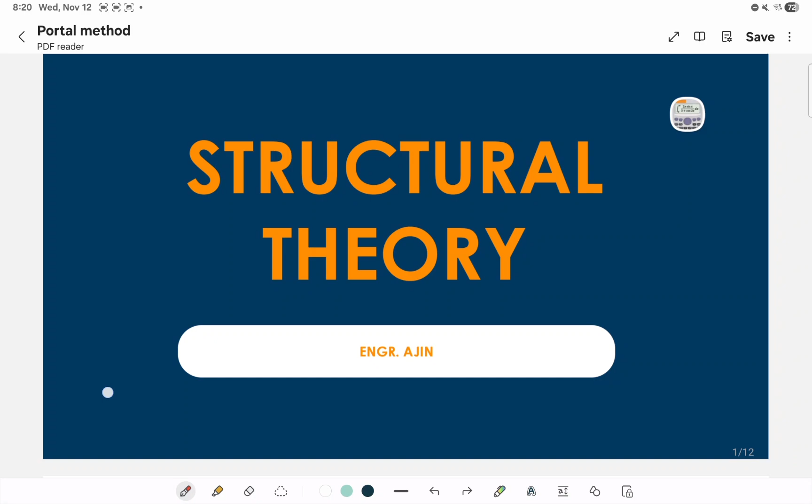Let's start with what's on your screen. Structural analysis is the prediction of the performance of a given structure under prescribed loads and/or other external effects such as support movements and temperature changes.

I took this from the book. In structural analysis, we have analysis of determinate structures and analysis of indeterminate structures. For determinate structures, I taught you how to get the stability and determinacy of certain structures.

We covered that for frames and for trusses. After that, I taught the next topics: area moment, double integration, and superposition.

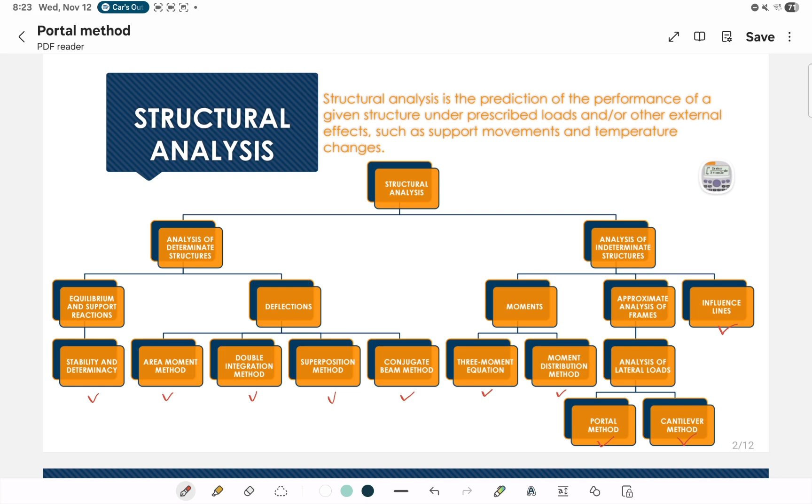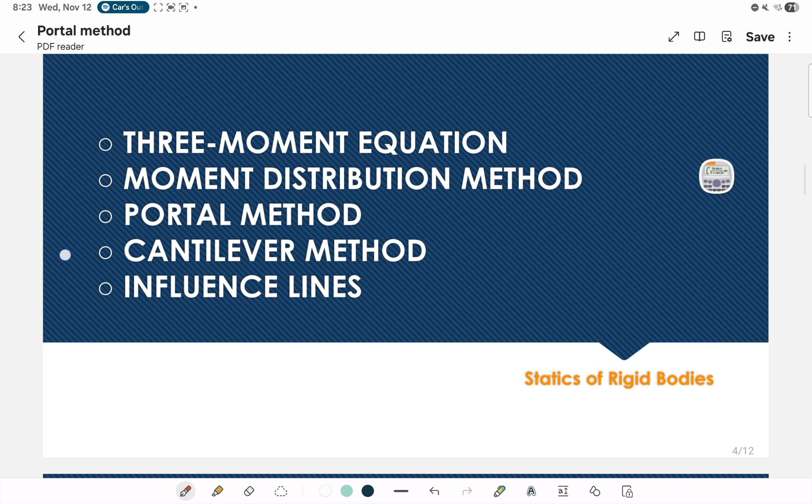The internal forces are estimated by making certain assumptions about the deformations and/or the distribution of forces between the members of structures, thereby avoiding the necessity of computing deflections. The primary reason for using approximate analysis in structural engineering is to quickly and efficiently estimate the internal forces and moments in indeterminate structures.

Particularly, this approximate analysis is done or analyzed during the preliminary design stage when we are designing a structure, before it moves to the construction phase.

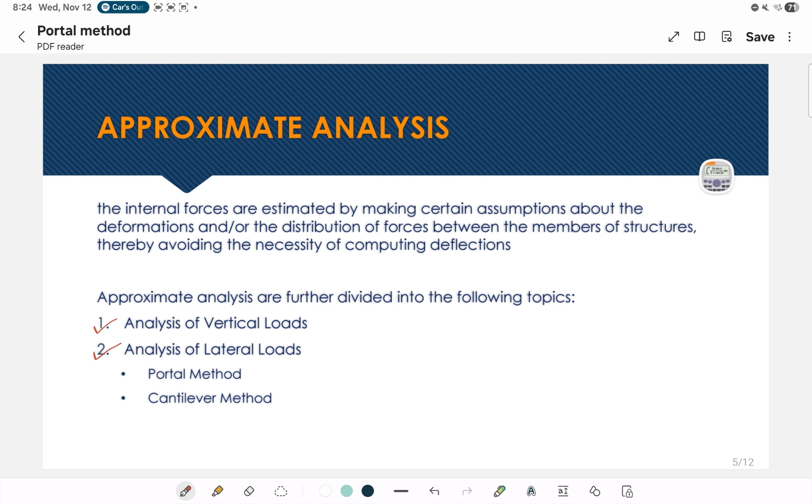The first is analysis of vertical loads, and the second is analysis of lateral loads. The portal method I will teach today falls under the analysis of lateral loads.

Let's proceed. Go ahead and read this. Here we go directly into the portal method. The portal method was initially developed by A. Smith in 1915 and is generally considered appropriate for the approximate analysis of relatively low building frames.

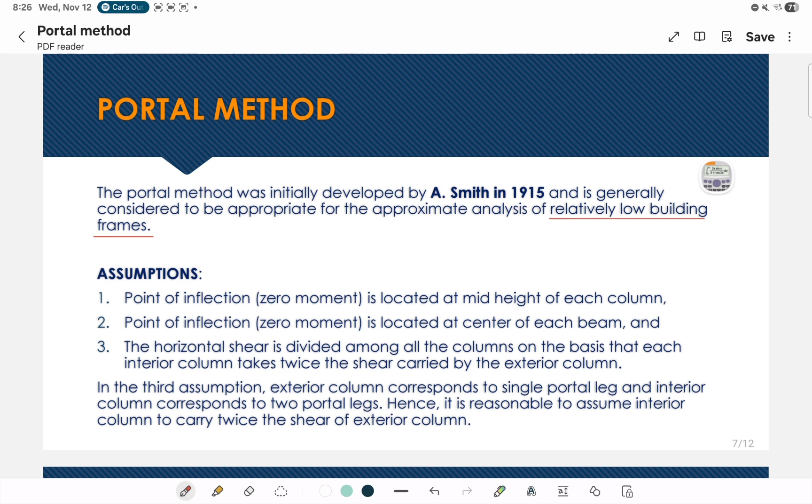Before we proceed to assumptions, let me insert this since I didn't include it when I made this presentation. Let's zoom in on this figure here. This is from your book, Structural Analysis by Aslam Kassimali.

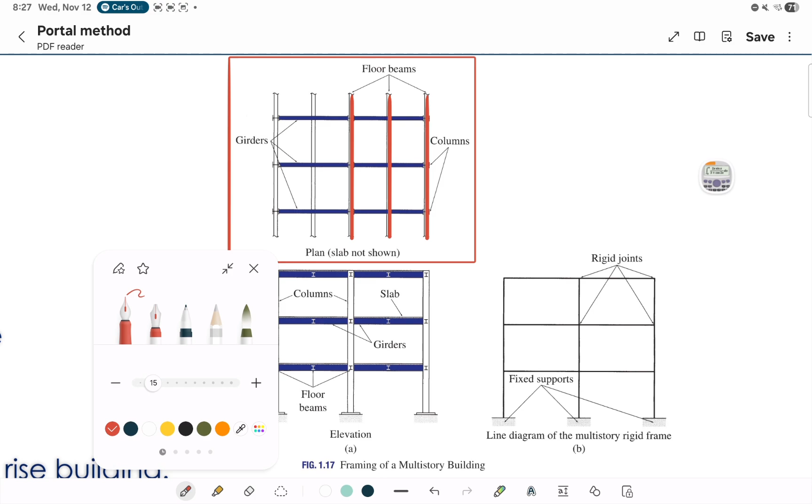Para ma-visualize nyo lang, kasi pagdating sa example, hindi na to masyadong i-explain. Direkta na agad siya sa line diagram niya. Okay, pag makikita nyo naman dito, ang mga columns natin ay andito siya. Since top view siya, mukha lang siyang mga square dyan. Ito lang siya.

Of course, hanggang dito yan ha. Hindi ko lang kinampleto, pero hanggang doon yan. Hindi ko rin kinampleto yung floor beams. Okay, so next one, i-check naman natin yung elevation part niya.

Ayan, siguro naman nabivisualize nyo na to. Pero syempre, hindi natin pwedeng laktawan. Okay, dito naman sa ating elevation part. Makikita nyo dyan yung tatlong parte ulit ng ating isang typical na low-rise building.

Pakita ko lang yung columns natin na orange yung ginamit natin kanina. So ito siya, ito na siya. Yan na yung mga columns natin. Of course, the girders are always the blue ones.

And then yung ating floor beams, makikita nyo na siya dito. Ayan, dito na siya makikita, itong mga square na kulay red. Okay, so sa line diagram niya naman, ganito naman yung itsura niya.

Ayan, ito yung kadalasang nakikita nyo na kapag nagdo-drawing ako sa board at nagpapakita ako, o nagdo-drawing ako ng mga frames. Okay, ito na siya. Ay, bakit ganun?

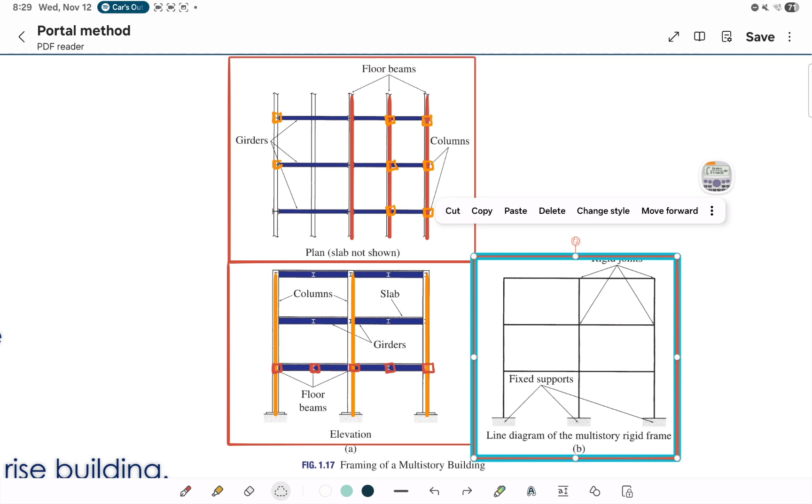Yan, yan na yung papakita ko lang. And then ilalagay lang natin dito, fixed supports. Ayan, ganyan, ganyan yung makikita nyo lang sa ating mga problems dito.

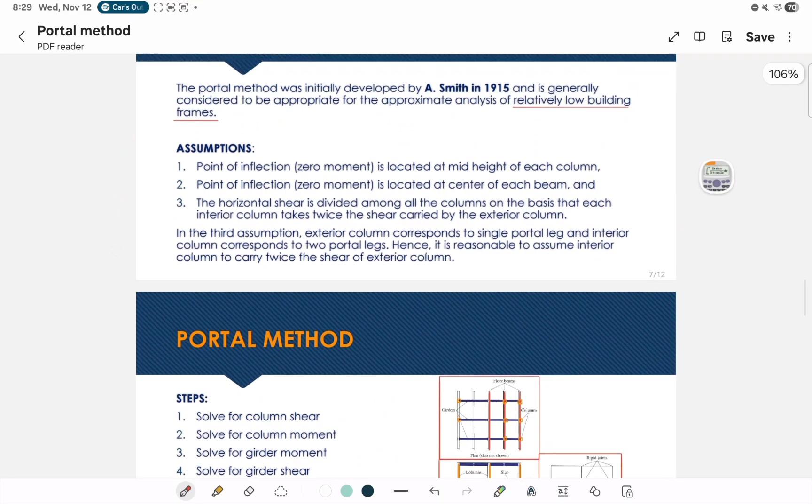Okay, so ayan. Punta ulit tayo, balik tayo doon sa bago dito. Ayan, so assumptions. In solving portal method, you need assumptions.

Okay, so first assumption, point of inflection or the zero moment is located at mid-height of each column. So sa center, mid-height, okay, nasa gitna. And then next one, number 2.

Assumption number 2: point of inflection or the zero moment is located at the center of each beam. Okay, pwedeng beam, pwede ring girder. Depende naman kung saan ka nakatingin eh.

Okay, next one will be the horizontal shear is divided among all the columns. Okay, so parang paghahatian nila yung horizontal load natin, paghahatian ng bawat columns. Kaso here's the catch: makikita nyo dyan, each interior column takes twice the shear carried by the exterior column.

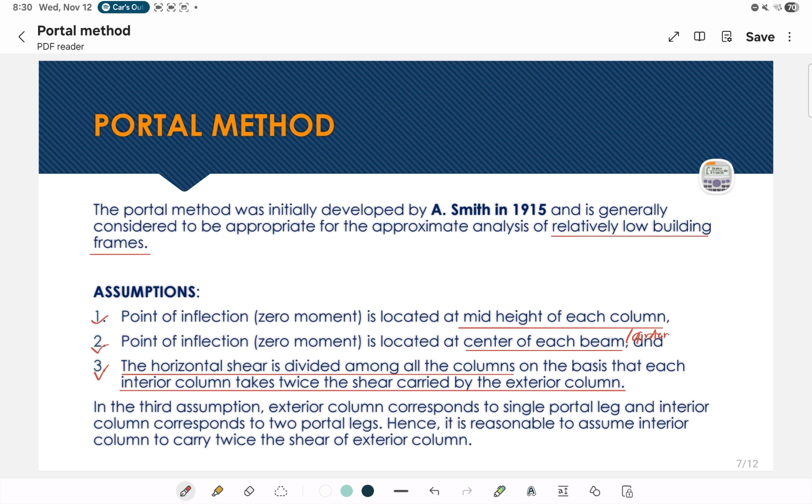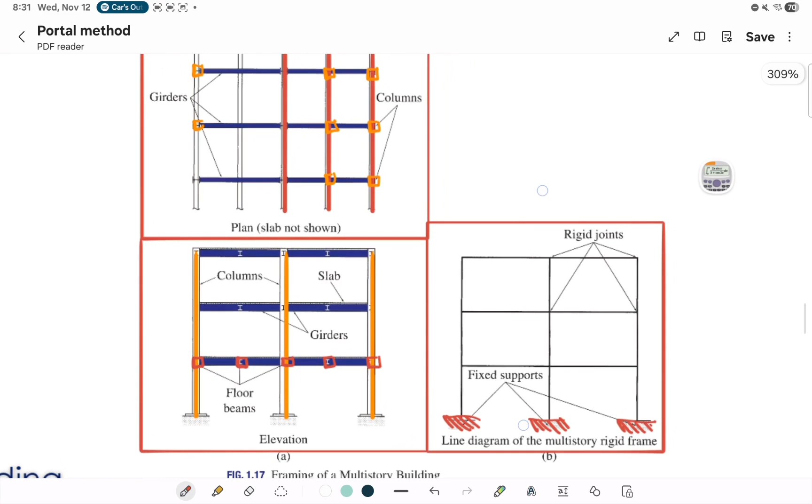So balik tayo ulit doon sa figure. Ayan, balikan natin, dito tayo sa may line diagram natin. Okay, so sa ating line diagram, makikita nyo dyan, sabi doon sa assumption, the interior column takes twice as much as the exterior column.

So ibig sabihin, if I have 1V, isang V lang, makita yung 1 V, or shear, 1 shear, sa ating exterior column, 1 shear again here. Ibig sabihin, dito sa interior column natin, 2V na yan. Okay, so V, 2V, V. V, 2V, V, so ganyan lang.

Ibig sabihin, say for example, if I have 10 kilonewton horizontal shear dyan, or horizontal load due to wind load, due to earthquake load. So kapag sinabi namang horizontal forces, diba, yun lang naman yun kapag in real life. Okay, so yung 10 kilonewton, of course, paghahatian ng tatlong columns. And since V, 2V, and V, divided by 4V.

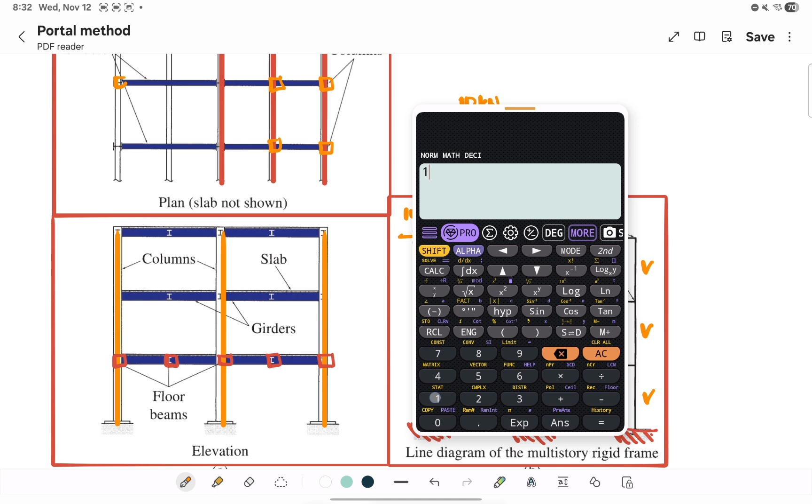Okay, so ibig sabihin, in every column, there must be, ilan ba yan, natin. 10 divided by 4, ayan, so 2.5. 2.5, so sa exterior column, there will be 2.5 kilonewton shear. Okay, and then in the interior column, meron tayong 5 kilonewton shear. Okay, so ganun lang yan.

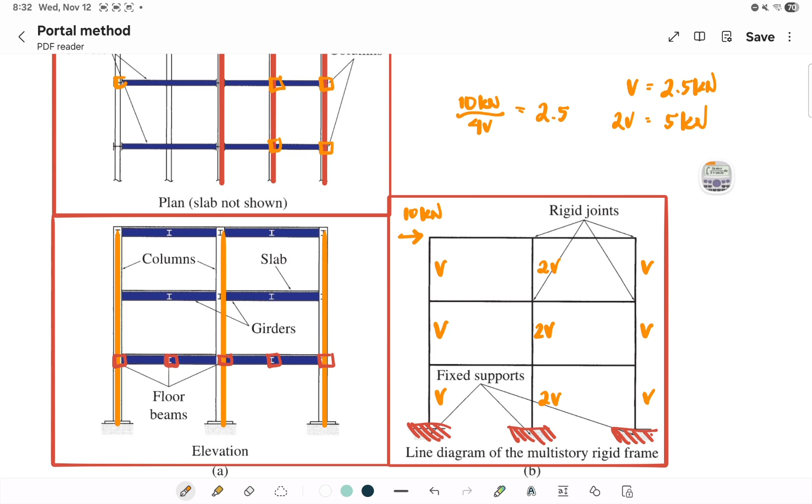So punta na ulit tayo dito na, dito na sa steps. Okay, sinimplify ko na lang yung steps kasi dun sa book na reference natin, ang haba. Pag binasa nyo yun, baka malito-lito pa kayo. So ito na lang siya.

Yun lang din naman yun yung sinasabi niya, pinahaba niya lang kasi in-explain niya, of course. Since ako naman, in-explain ko to verbally. Ayan, naka-record naman siya, pwede ko naman nang sabihin dito.

Okay, so the steps will be: first one, solve for column shear. Actually, yun yung ginawa natin kanina, ito yun. Okay, then the next one, solve for column moment. Mamaya bibigyan naman tayo ng example. Next will be girder moment, girder shear, and then column axial force.

Okay, itong mga to naman is depende sa problem. Ito, ipapakita ko lang kung paano mag-analyze ng isang buong low-rise building. Pero pagdating kasi sa problems na ibibigay ko sa quizzes nyo, exams nyo, magbibigay lang ako, sasabihin ko, okay, what will be the value of the axial force in column A? Ganun lang, so isa lang, hanapin nyo yung answer dun sa ginawa nyong analysis ng buong low-rise building.

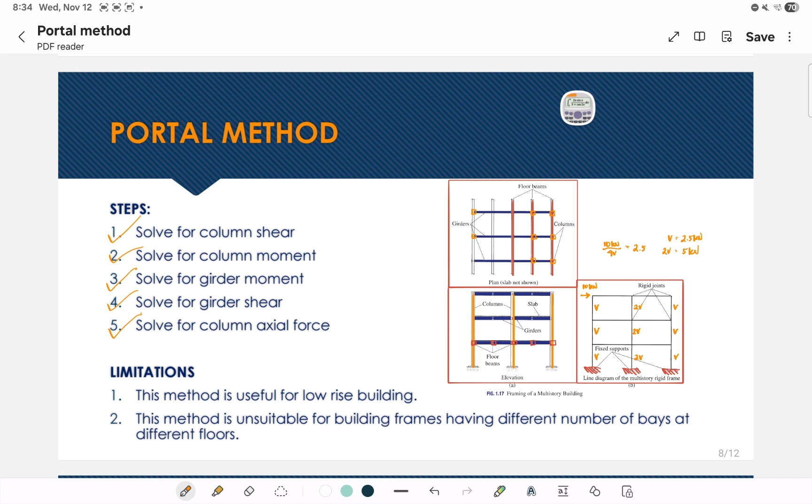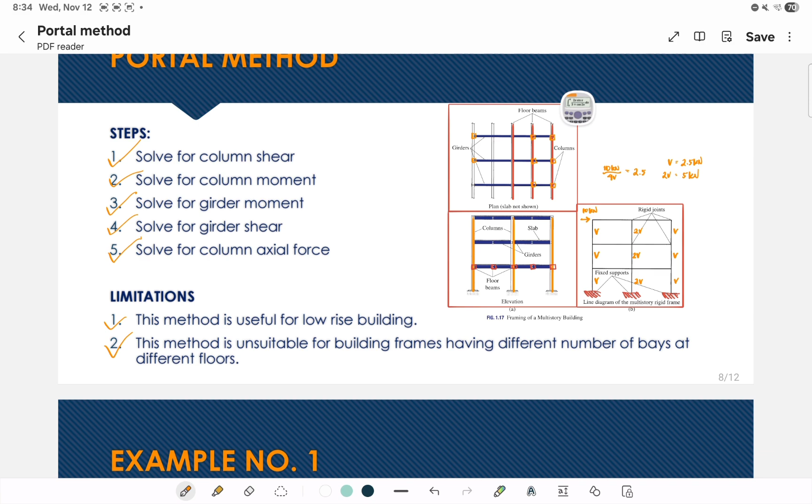So ganun tayo ha, so limitations, nandito naman na siya. It is only useful for low-rise building, and then this method is unsuitable for building frames having different number of bays at different floors. Okay, so wag nyo na masyadong pansinin ito since portal method lang na lahat ng ating gagawin. Okay?